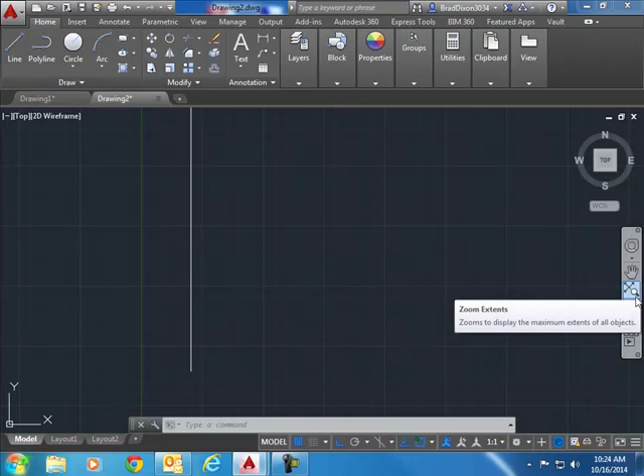Right now you're going to run into the problem where you can't get the whole thing on the screen and it won't let you zoom out anymore. So all you have to do to alleviate that is come over here to your zoom bar and zoom out and click it until those things go away. And my computer locked up.

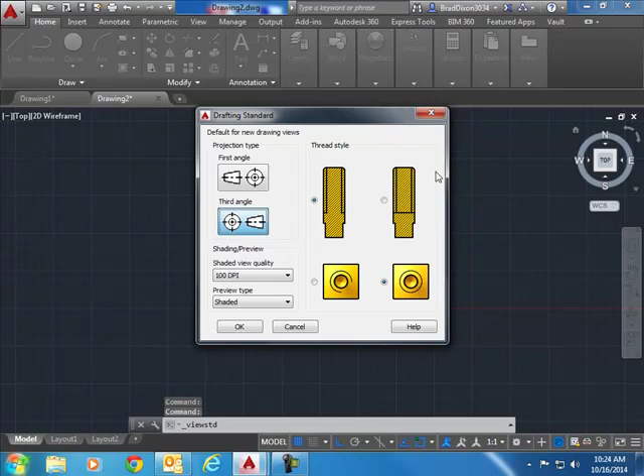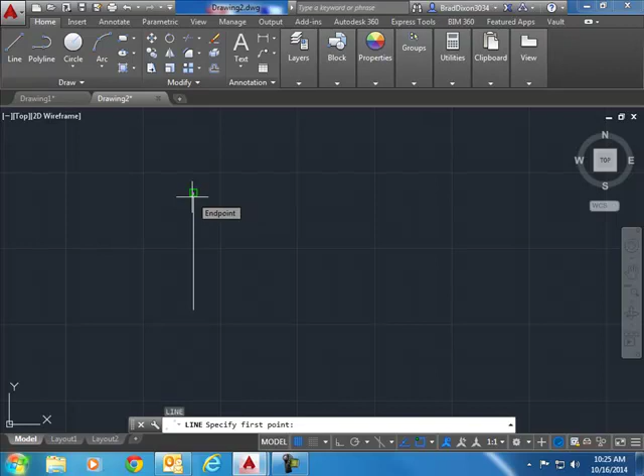Okay, so I'm going to move this away from there just so I can see it a little bit better. Just use my move command. And I'm going to zoom out a couple more times. Alright, now I have an 8-foot line there. I'm going to draw a line. I can either pick it here or type in L, enter. And I'm going to choose the end point of that line. If these O snaps aren't coming up on your screen, you can hit F3 to turn them on and off.

I'm going to click on the end point of the line. I'm going to point it the direction I want it to go. I'm going to type in 10 feet. And to continue that, turn my ortho back on. I'm going to point down 8 feet. And then I'm going to point over this way 10 feet. Hit my space bar to get out of the command. Same thing as hitting enter.

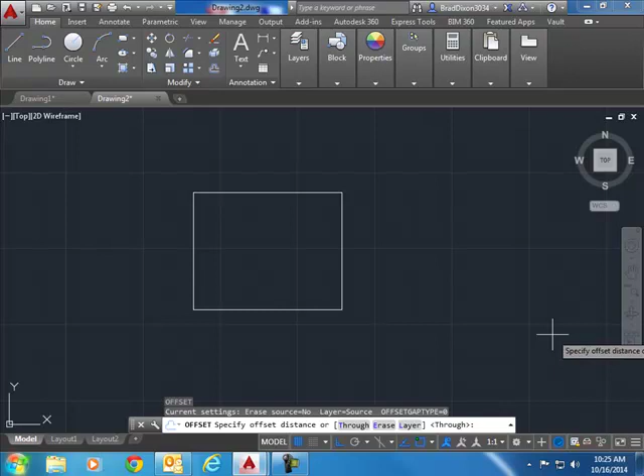At this point I want to use my offset command. That's this button right here. Or I can type in O, enter. The first thing it asks me for with my offset command is my offset distance. So I have to think here for a second. First of all, what am I drawing? I'm drawing a top view of my walls. The top view of my walls is 3.5 inches wide. So I'm going to offset 3.5.

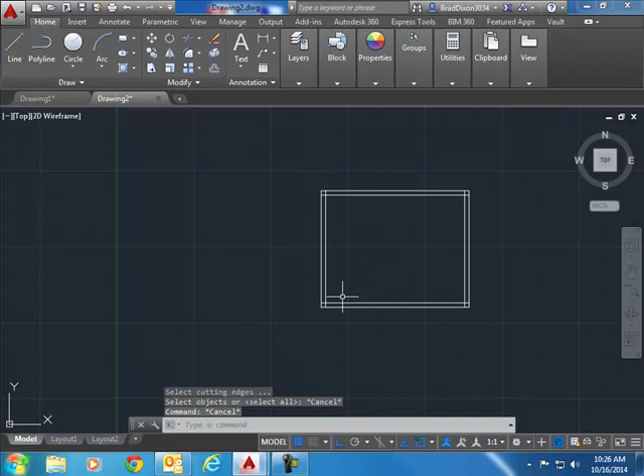I'm going to select that wall and point inward and left click. Do the same thing here, same thing there. And now I have the start of my walls laid out in plan view. The next thing I'm going to do is I'm going to use my trim command. I could also come up here and select it from here. It asks me for my cutting edges. So I'm going to select that one and that one. I'm going to hit enter. And then I'm going to come in and get rid of the parts of the lines that I don't want. I'm clicking on the end of the line that I don't want there anymore.

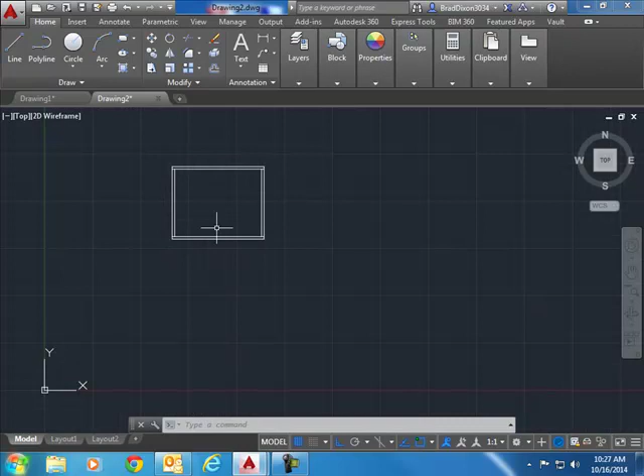So this right here would be one wall. This is my plan view. Now I want to draw this in elevation view so that I can actually lay it down and start building my wall from this. So I'm going to copy the bottom line. I'm going to make sure my ortho's on, and I'm just going to copy it down here. At this point I'm going to use my offset command again. And basically what I want to do is I want to offset the thickness of my sole plate, the bottom plate of the wall.

2x4 was 3.5 inches wide, then the thickness is going to be 1.5 inches. So for my offset distance, I put 1.5, select the object, I offset it up, and then I can just draw. Right now it's just 2 lines. If I draw the ends on those 2 lines, connecting them, now I have a plate.

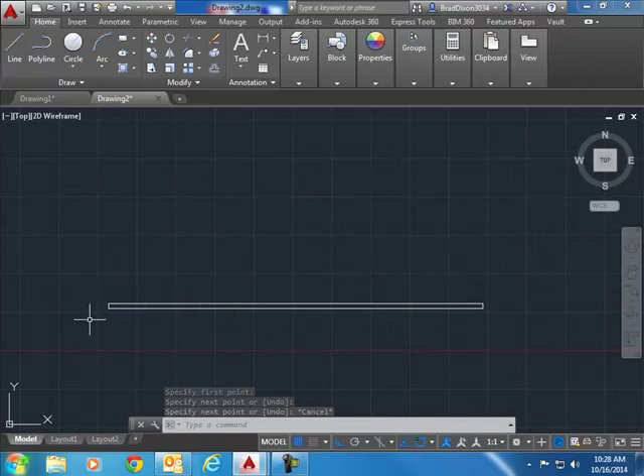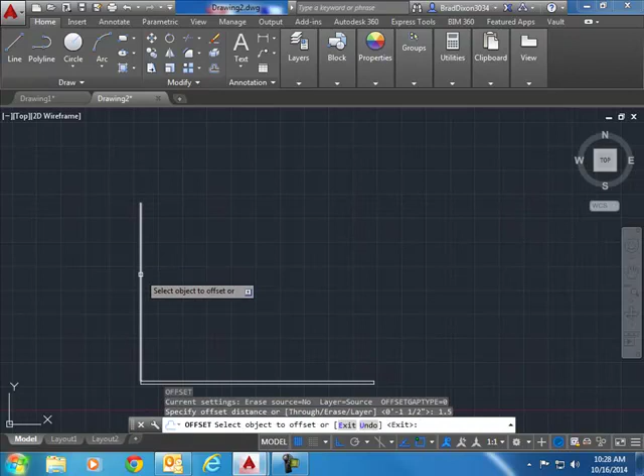The next thing I'm going to do is draw my stud. I'm going to start on the left hand side and go up. So again, I use my O-snaps, I start at that corner, I point in the direction I want to go, and I type in 92.625 inches. That's 92 5/8 for my pre-cut stud length. Then I'm going to offset it 1.5 inches for the thickness of my stud.

And on top of this, I could do this a lot of different ways. I'm going to show you a different way than the first time I showed you. At this point, I'm going to use my mirror command. So I could choose mirror right there, or I could type MI enter. I want to mirror my bottom plate, my sole plate.

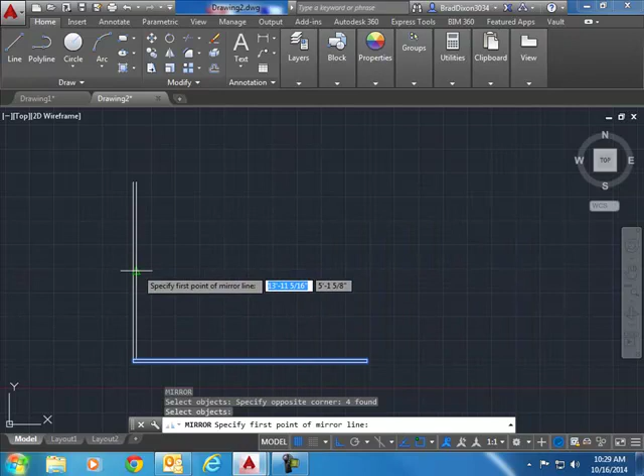Whenever it asks me for my mirror line, first point of my mirror line, I want to choose the midpoint of this. Now it's not popping up automatically, so I could come down here and I could choose midpoint. I could add it, and now I'm going to choose the midpoint of this line as my first point. I'm going to draw a line over this direction, which is going to put that up there.

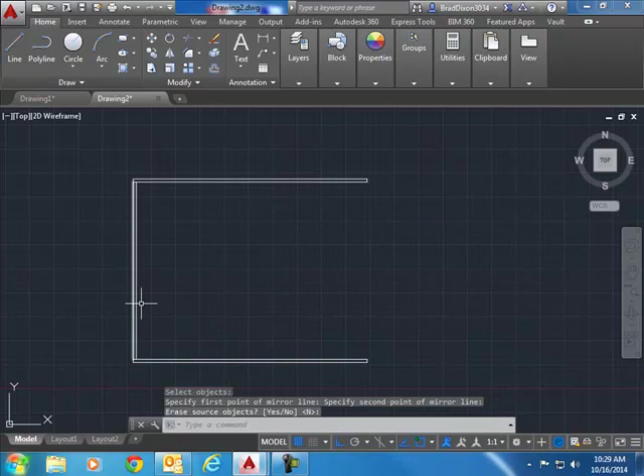And it asks me, do I want to erase the source objects? No, I don't, so I'm just going to leave that as no. Hit enter, and now I have my top plate. At this point, I could do a lot of different things. I could copy. I'm going to select the stud that I want to copy.

I hit enter. I come out here somewhere and I put my cursor down and I tell it how far I want to copy. I want the studs to be spaced at 16 inches. So I'm going to type in 16, enter. I could keep going. I could type in 32, 48, 64, 80. Or I could do it the hard way. I could copy each one individually. Keep copying it 16 inches over.

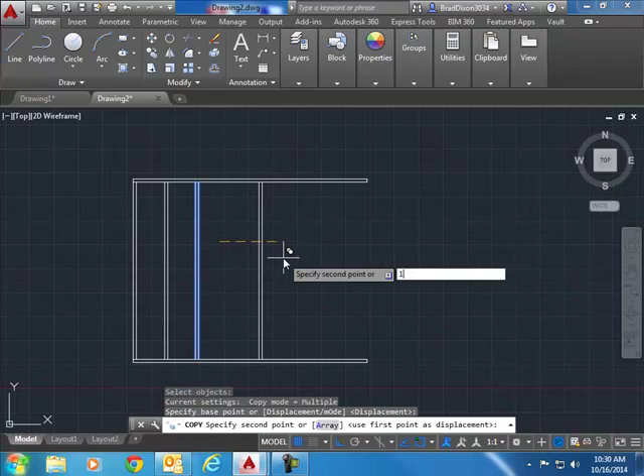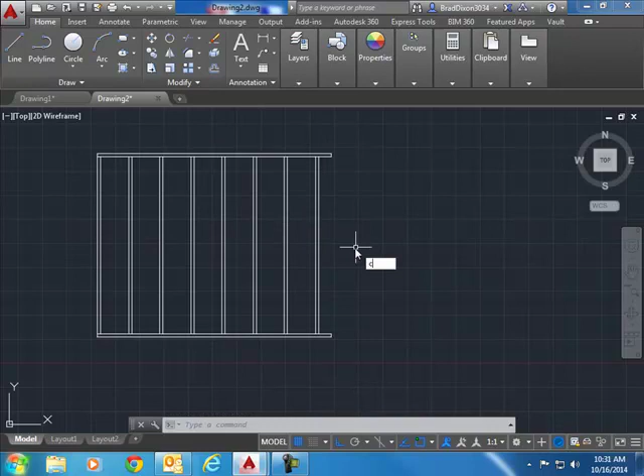The other option I have is to use the array command, which would be right here, a rectangular array. So you can play around with that. And right now it looks like I'm going to have to add another one in at the very end. Okay, so just looking at this, I also know, and I'm going to move this whole thing a little bit closer. It's still aligned with that one. I have my ortho on.

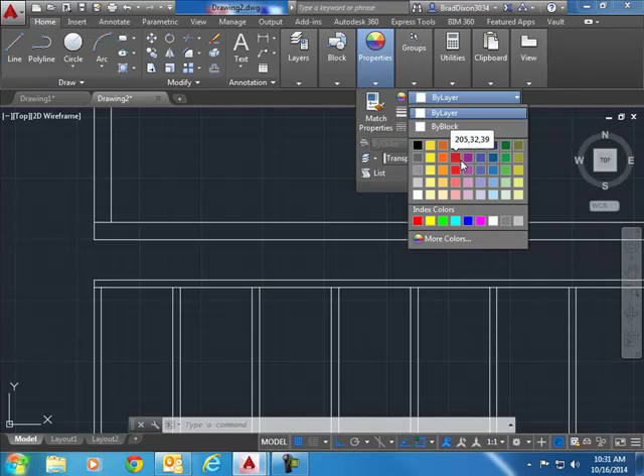At this point, I know that I need to add a corner stud in right here. I'll just do that in a different color so that you can see what's going on. And we'll make it this orange color. Right here, I want to have my perpendicular O-snap set also. So I'm going to draw a stud right here, just so that I know what I'm doing.

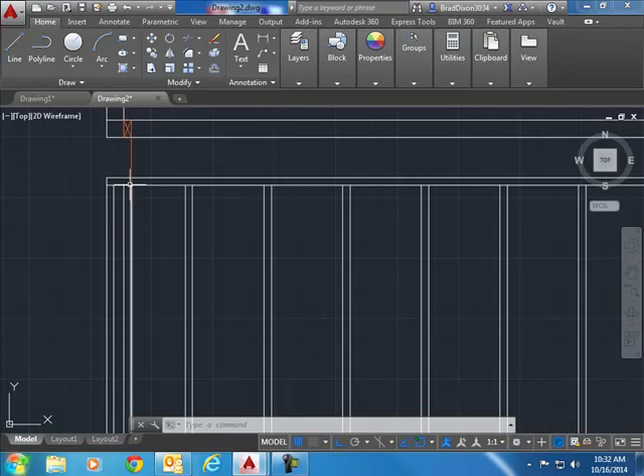And on this side, I'm going to do the same thing. So the next thing is I could draw a line right there just to show where the next stud's going to be. I could copy this one and do that. So I just copied it from that endpoint to that endpoint, or that intersection. And if I do the same thing here, that's exactly how I would have to have it for my corners.

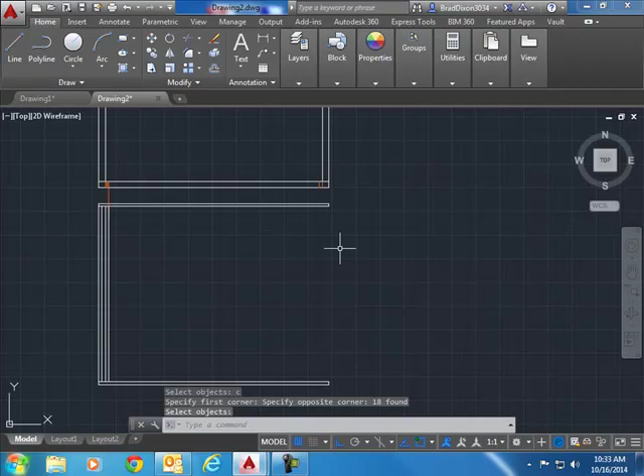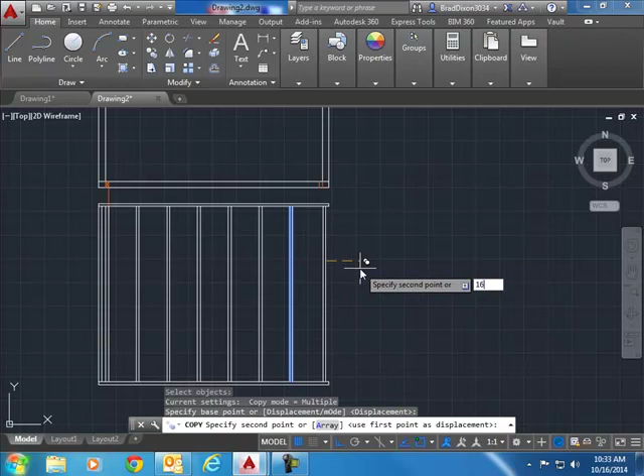Now I can do this a little bit differently. Since I have another stud here, just for that corner, what I could do is I could get rid of all these ones, because that's an awful lot of studs there in that corner. And now, if I copy these over, 16, 32, 48, 64, 80, 96. Don't know what the next one is, so I'm just going to copy 16 inches. And then I'm going to copy one to the end.

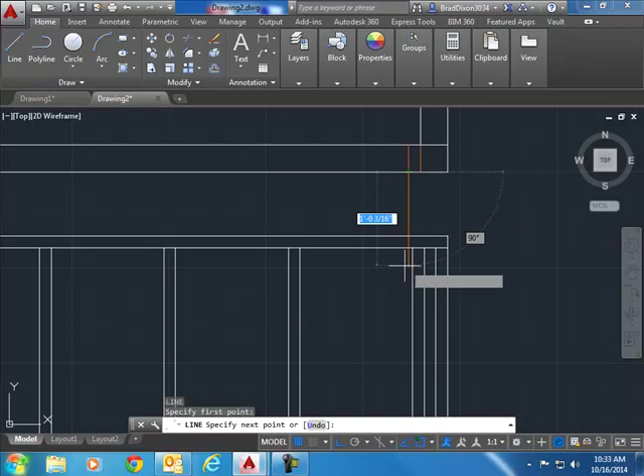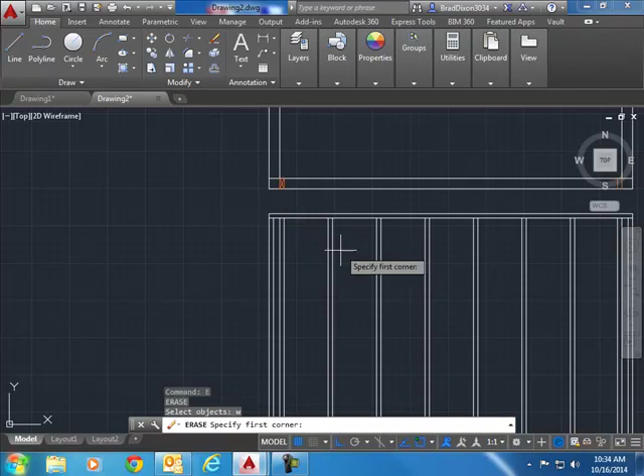So at this point I have a wall laid out, and this one is not lined up, so I'm just going to move that over from the end point of that to the perpendicular. And all of these are spaced 16 inches apart except for this one, which is just a little bit less, which would be 15 and a half, which is going to be fine. So doing it this way, I had one less stud. At this point, I could print this out and I could build this wall.